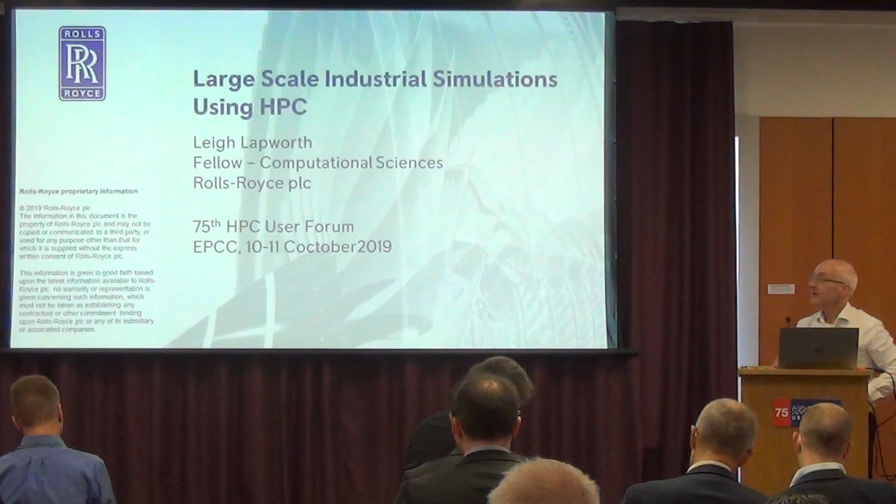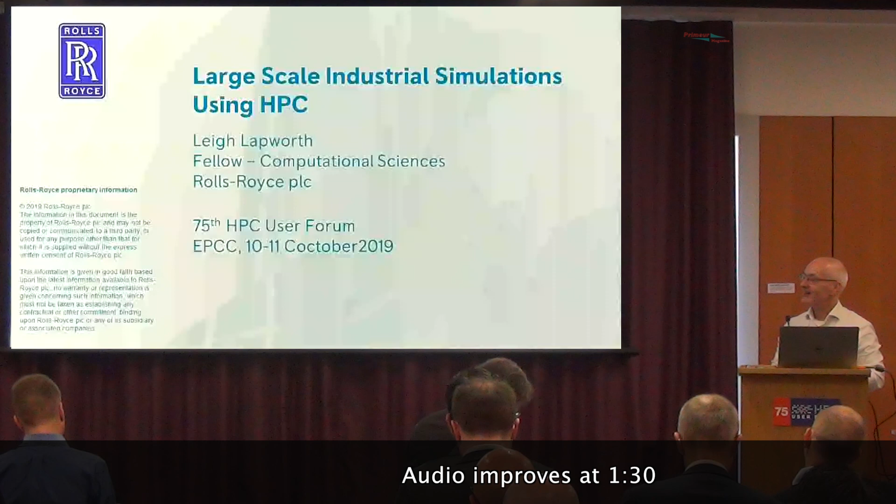Okay, so I'm going to give an industrial perspective. I'm a fellow of Rolls-Royce in computational sciences. I've just passed my 32nd anniversary of working for Rolls-Royce. I spent much of my career doing computational fluid dynamics and I've transitioned into computational sciences.

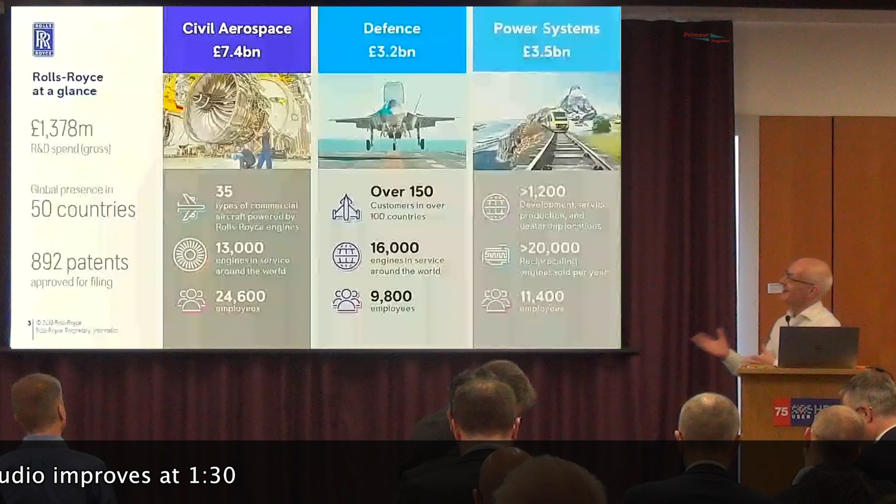I'm going to start, as I always do, with a bit of a business overview, just so everyone's clear on what I'm going to talk about. It's not cars - this is Rolls-Royce. We have three business sectors: civil aerospace, defence and power systems. I'm not going to go through all the numbers, you can see them up there. Civil aerospace is about half the business, twice the size of the other two. Much of my work's been done in civil aerospace, though I have worked in some other areas.

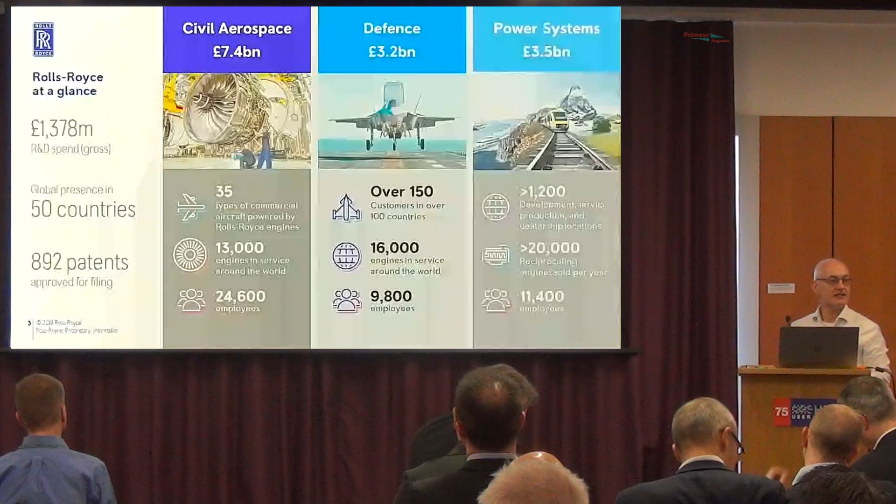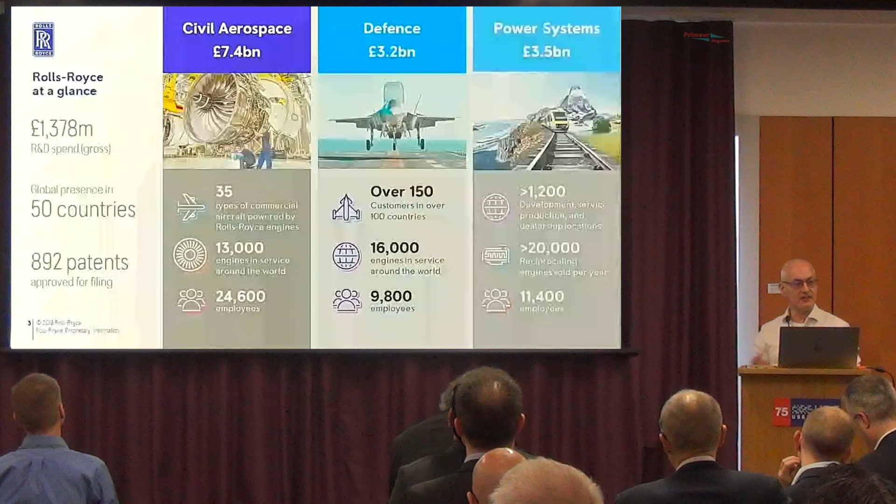We have HPC across all of those sectors, but again, the largest installations are in civil aerospace. Looking at our R&D activity, we spent last year £1.4 billion in R&D, and about 1.1 billion of that was Rolls-Royce's own money, a lot of our own money on R&D.

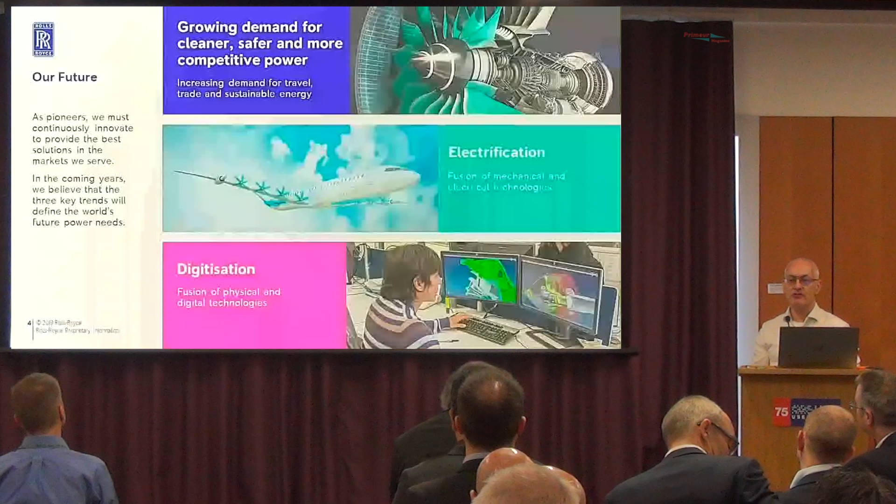Just one other slide on the business - these will be common themes across many industries. Three main drivers for the business: one is the green agenda, cleaner, safer power, and as part of that, electrification. Just as the automotive industry is moving towards electrification, so are we. We've got several activities on that, including one with a company down in Gloucester, and we're hoping to break the airspeed record soon for all-electric flight. We're doing quite a lot on electrification.

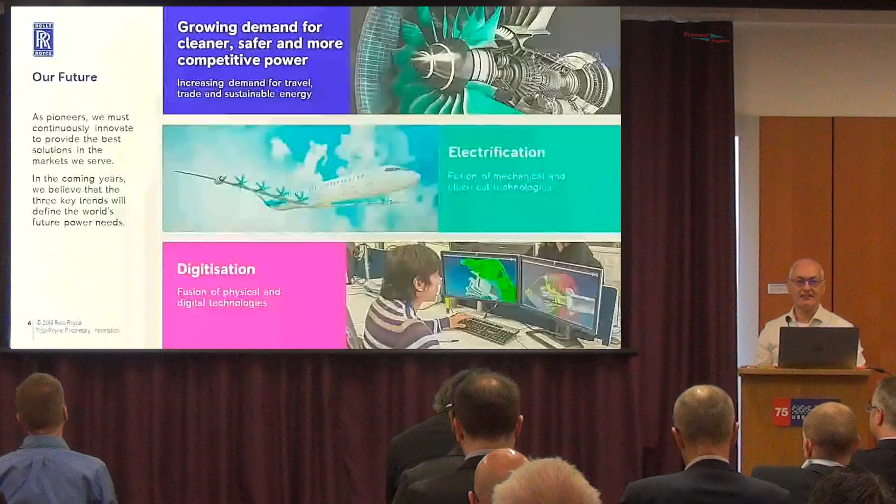And then digitalisation of the business. For those of us that's been in HPC, we've been digitalising our business for the last 30 years, so I'm sure others feel the same about digitalisation.

As you go into the turbine, the turbine blades are about that big, and each one of those generates the same horsepower as a Formula One car. Again, the air temperature there is 200 or 300 degrees above the metal's melting point.

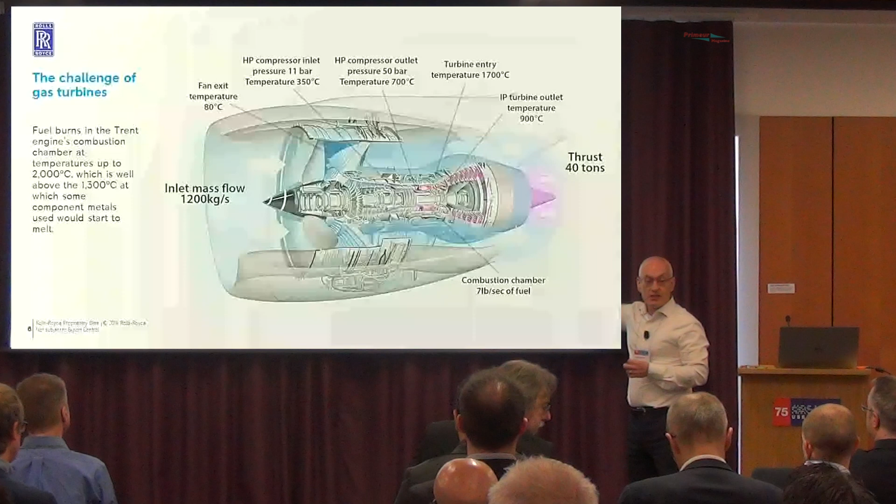As it comes out the back, it's going at 900 miles an hour. My favourite stat: one of the ways we stop the metal from melting is we have coatings on the blades - thermal barrier coatings. These are sub-millimetre coatings, and they can withstand a 200 degree temperature difference across them. So if you got an ice cube, coated it in our thermal barrier coating, and put it in your oven at 200 degrees C, it would never melt, in theory.

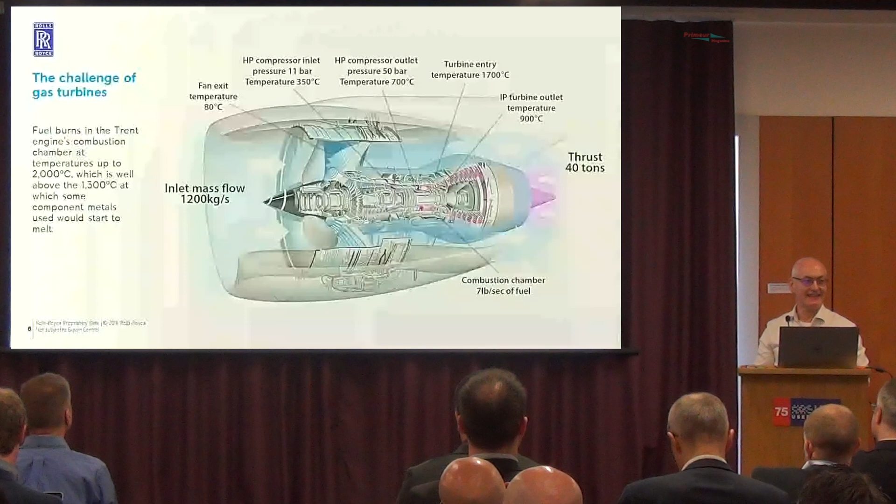So yeah, we all have difficult problems. We like to think we make the most complex product on the planet - I'm sure others could lay claim to that as well. So that's the backdrop, those are the sort of things we're modelling.

In terms of drivers, three drivers I'm going to talk about - we've touched on them already, I think, to some extent. The first is complexity, component complexity. Let me just explain what we've got here. Is there a pointer or something? No, it's not.

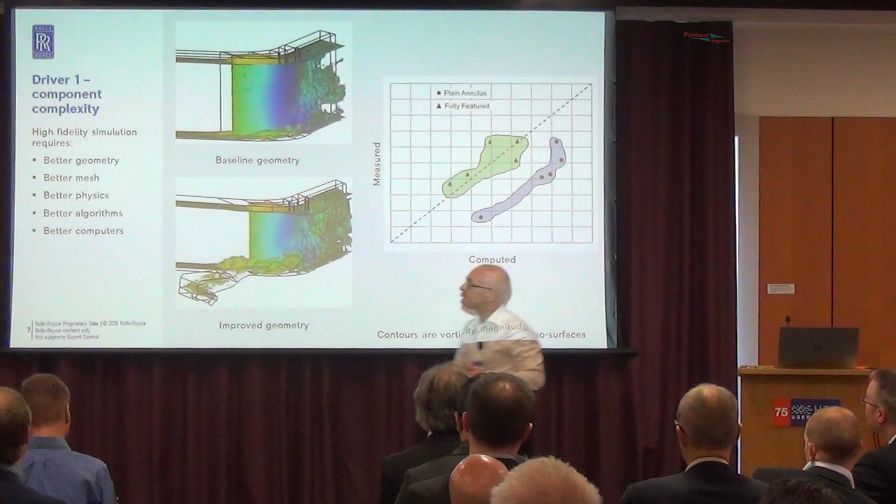Therefore, you get a much bigger corner vortex and a much bigger effect downstream. And if we look at that in terms of measurements, this is CFD predictions versus the experiment. With the approximate model down here, we're some way away from the data.

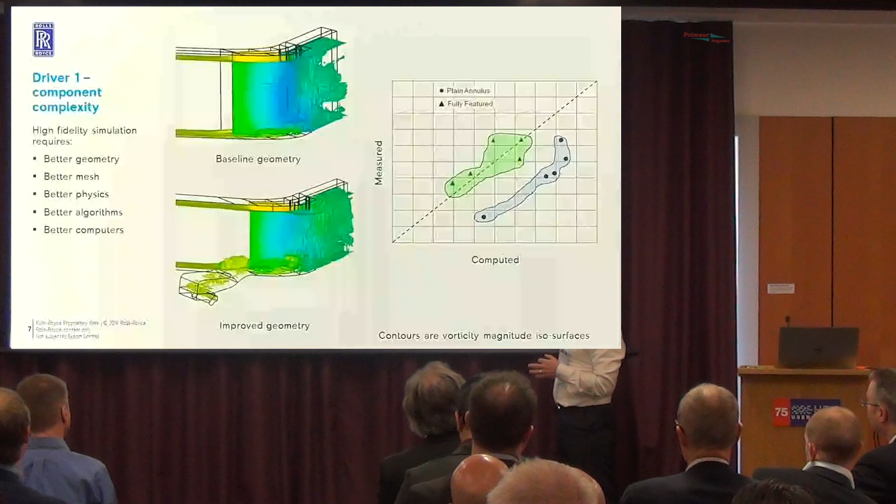As we start to put in the proper geometry, then we get much closer to the data. That's just a line of computed versus measured.

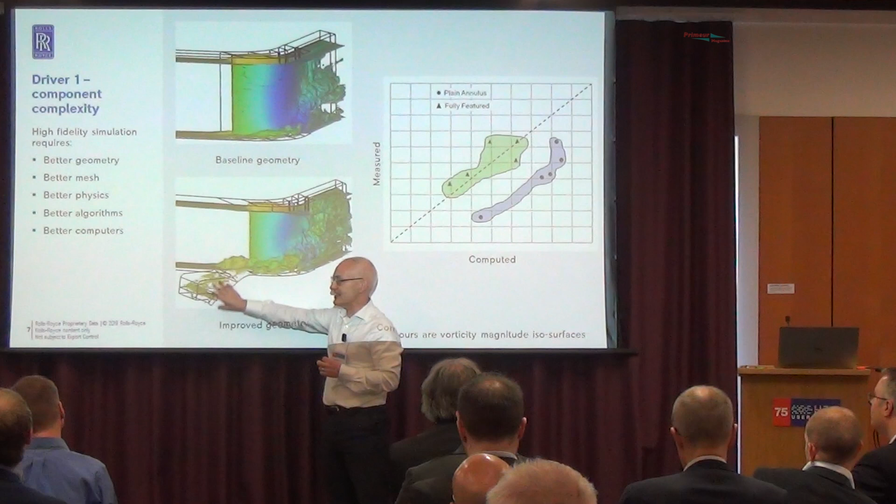One of the messages from this is high fidelity simulations isn't just about physics, it's about making everything high fidelity. You need better geometry, and by having better geometry, you therefore need generally better meshes. The meshing for some of these very complicated geometries is much more difficult than an aerofoil, so you tend to get much lower quality meshes in there. So meshing is difficult, and obviously we've now got much more complicated physics going on here.

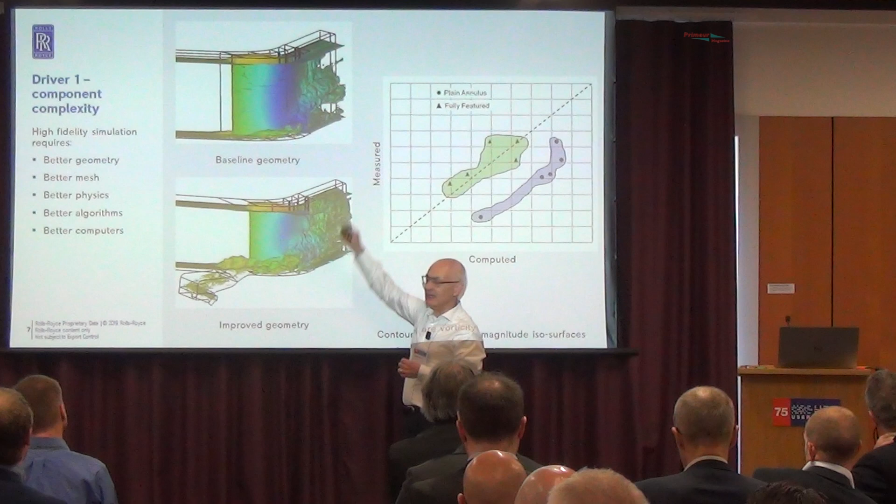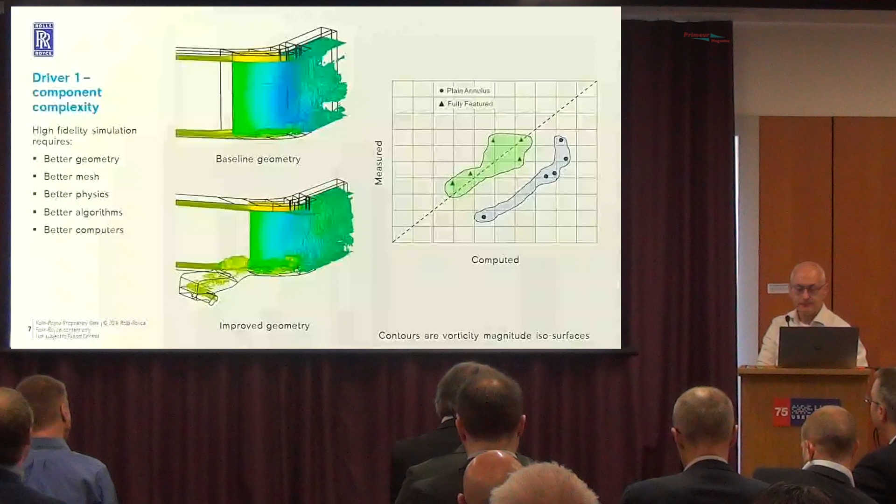So we might just use a normal turbulence model up there, large eddy simulation down here. So physics, and then because you've got these very high condition numbers, because you've got poor mesh, you need better linear algebra, better matrix inversions, and of course that all leads to a bigger problem, and you need better computers to run that. So that's one driver towards complexity.

You've then got component interactions, and turbine engines do what they do by having alternating rows of stators and rotors. There's many of these through the machine, and basically you've got a dynamic topology. One rotor is moving past the next. At the moment, the topology within a domain is fixed, but it is moving.

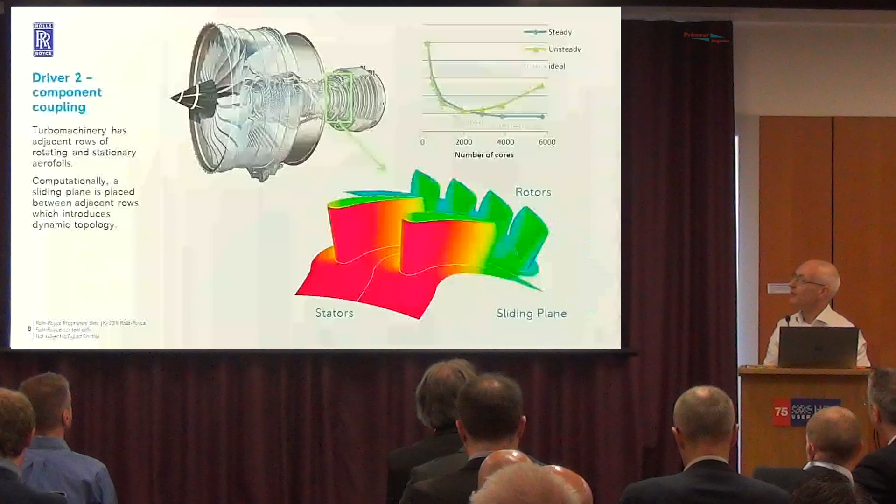It scales similarly to the steady code up to about 2,000 cores, I think that was 1920. But then as you go further, you lose the scaling - it actually gets slower as you add more cores. Those results are a couple of years old, we have improved on those since then.

And then once you can do the component coupling, then you can start to do system modelings. And really, being able to do systems is the other big driver for the calculations.

First reason for doing that is you can move your boundary conditions away, so you can have boundary conditions at the start and the end. When you do a component, your boundary conditions have got to come from somewhere - you can't do a calculation without boundary conditions.

So they often come from a lower order model. We'll do maybe an axisymmetric or a 2D model to generate boundary conditions for a single component. Once we can do a whole subsystem, we then have boundary conditions just at the inlet and exit.

And also, you've got all of the components potentially interact with each other. So in this case, the blade at the back, the blade at the front - lost my mouse again - the blade at the front can influence the blade at the back, and vice versa. So you get pressure waves.

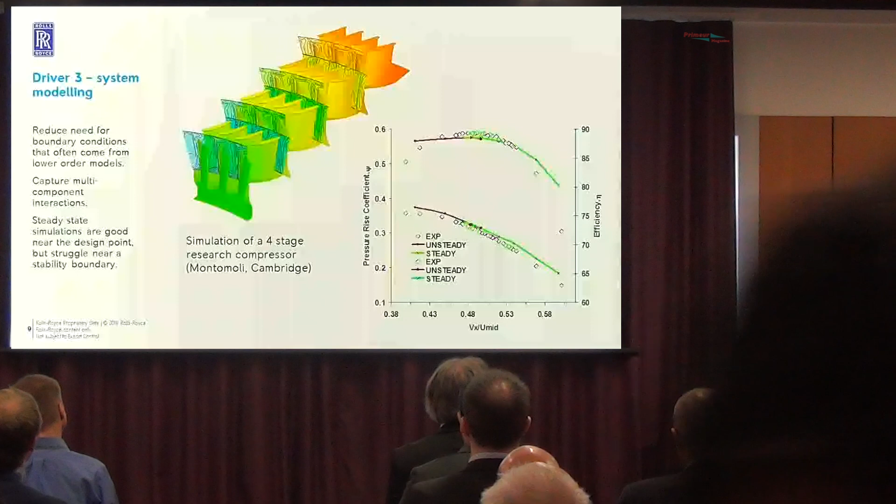We saw the acoustics in the last slide. You can get acoustic waves, pressure waves that come forward from the rear blade that influence the front one, and you get normal convection, vortices, boundary layers, wakes, etc., that then flow downstream and affect the front ones, affect the back one.

And again, if you want to do that and get good answers, there's a driver to do better physics, so you can't really do that with a steady state. So these calculations here, you've got pressure rise, which is the measure of how well you're compressing the air, and then you've got efficiency as to how efficient you are at doing that.

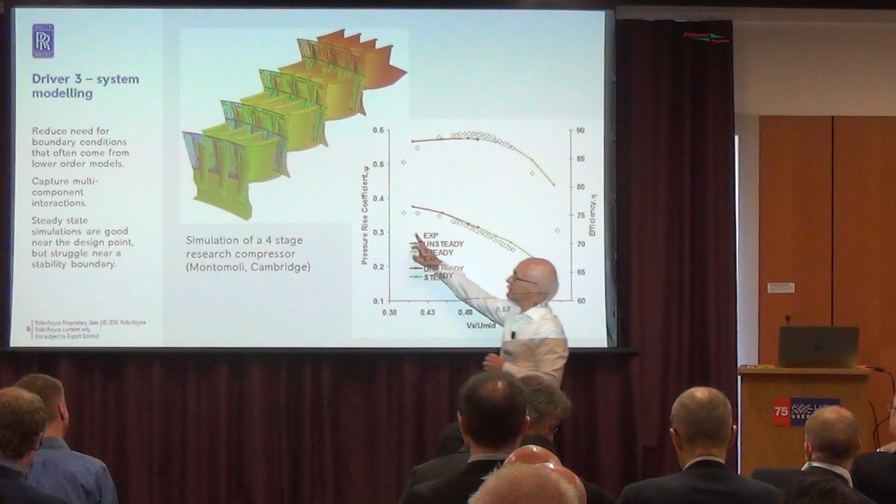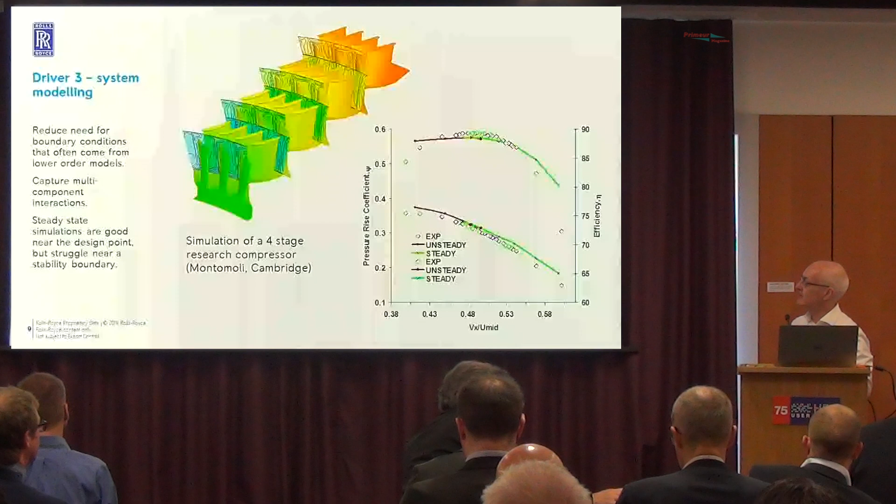One of the key things in designing compressors is what's called the stall point, the operability of the compressor. I'm sure when you've flown, you've all been flying and felt the wing stall - you're flying, and all of a sudden the airplane drops. That's a sort of mini stall on the wing. We have exactly the same inside the machine, so this stall point is an important design characteristic.

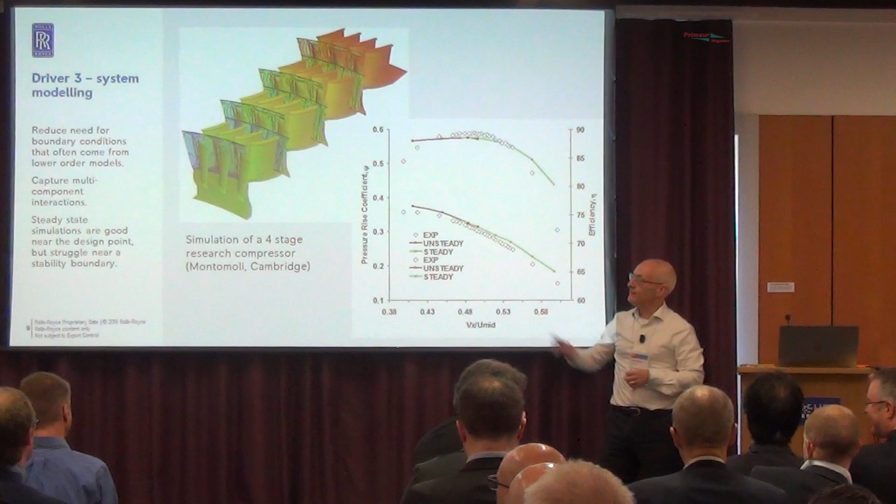What happens here is the steady state calculation can only get that far - the steady state will diverge at that point. If you run unsteadily, it's not perfect, but it's definitely better. We definitely get a much better prediction of that stall boundary.

So what does that mean for us as a business? Why do we do all this stuff? This is the XWB, a new engine. I'm not going to read all of these off, but as you go around the machine, look at the different components, we're using simulation of one form or another. A lot of CFD, finite element analysis, thermal analysis, etc. And things like weight - we do stress analysis so we can reduce the weight.

These are stats from our website. So that's 6 times the computing power applied than the previous generation. I don't know where that comes from, but it feels too low to me. It feels far too low to be correct.

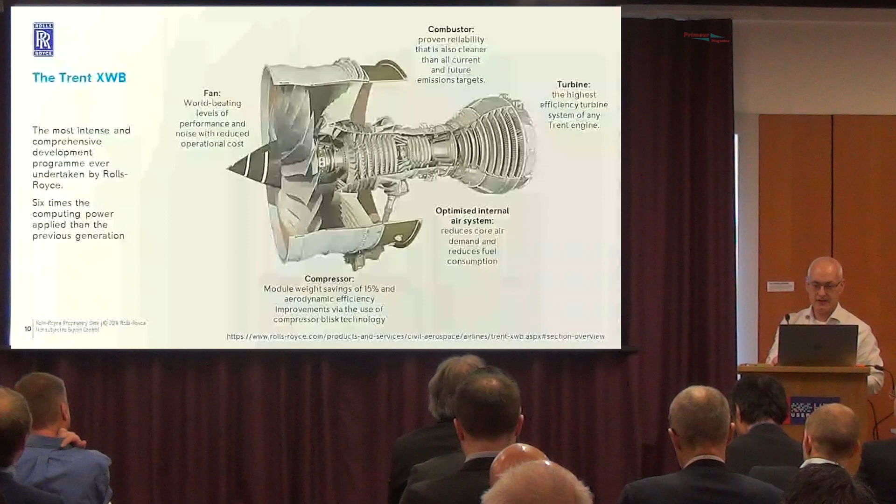I'm not going to go through all of those. I'm just going to pick on one area where we do simulation - the fan. We actually do a lot of different types of simulation on the fan. Basic aerodynamic performance is important. The acoustics we've just seen is also important. We have various criteria - one is if a fan blade comes off, it has to be contained within the engine.

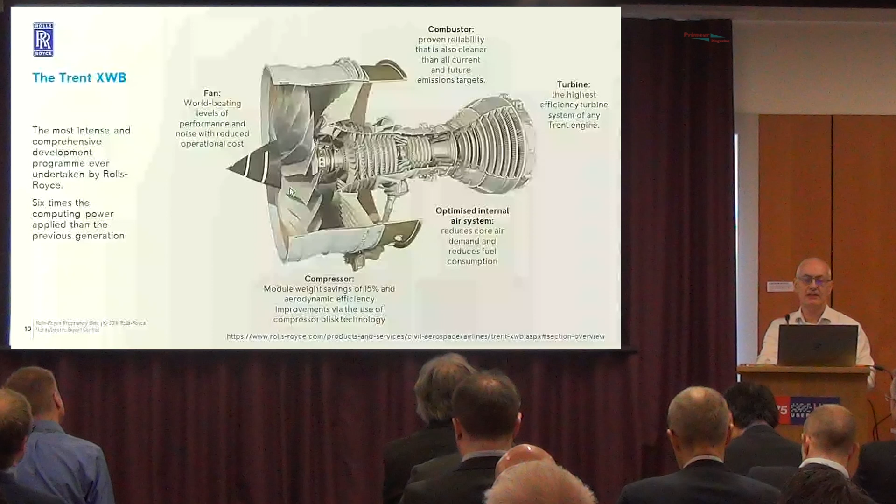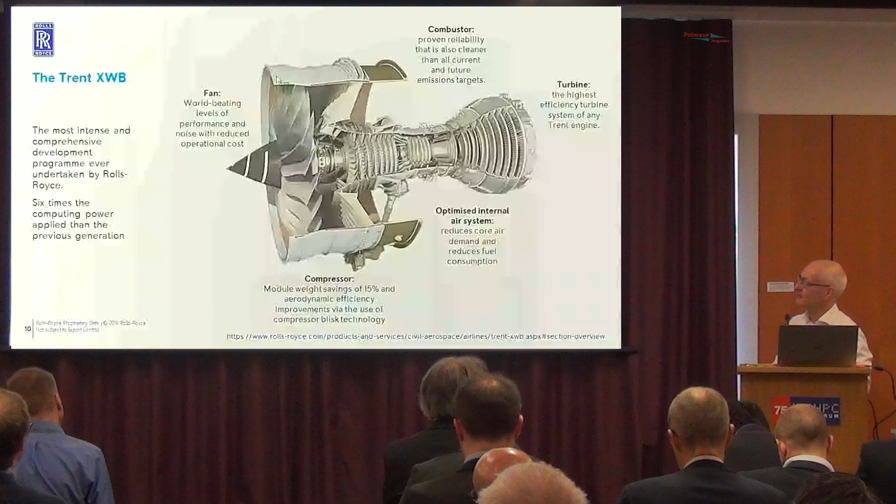The containment around here includes Kevlar and various features that are there to contain the engine, and there's an interaction between the shape of the fan and the containment system. So if you can see here, the fan is arced forward. That improves aerodynamic performance, but because the line of sight of that leading edge of the blade could potentially come outside the blade, we've got to move the containment system forward so we can contain that bit of blade if it comes off. Therefore you add weight, so we have all of these compromises between improving aerodynamics in one place and maybe making it noisier or heavier.

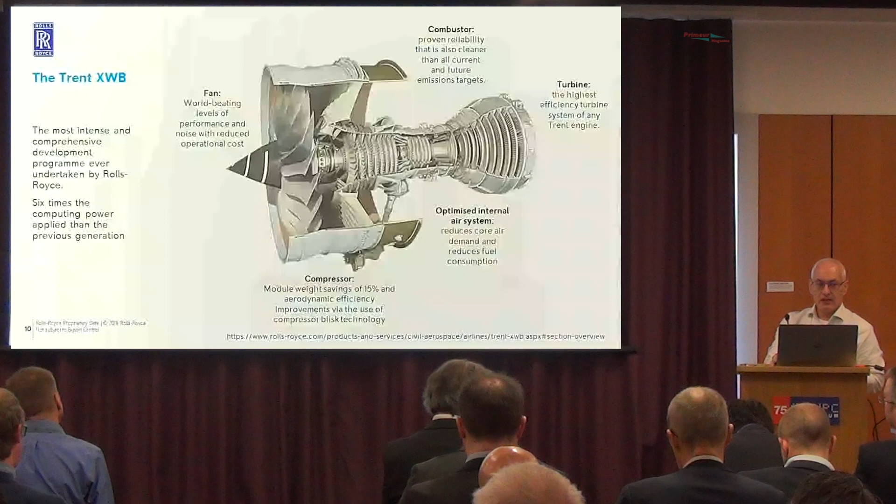One of the simulations we do - there are a number mandated by the FAA, EASA, and the Civil Aviation Authority - is bird strike. For some non-Darwinian reason, birds like to flock at the end of runways, and on civil aircraft there are about 25 bird strikes a day. There's a range of things we have to do - we have to simulate flocks of birds, and simulate a range of heavier birds.

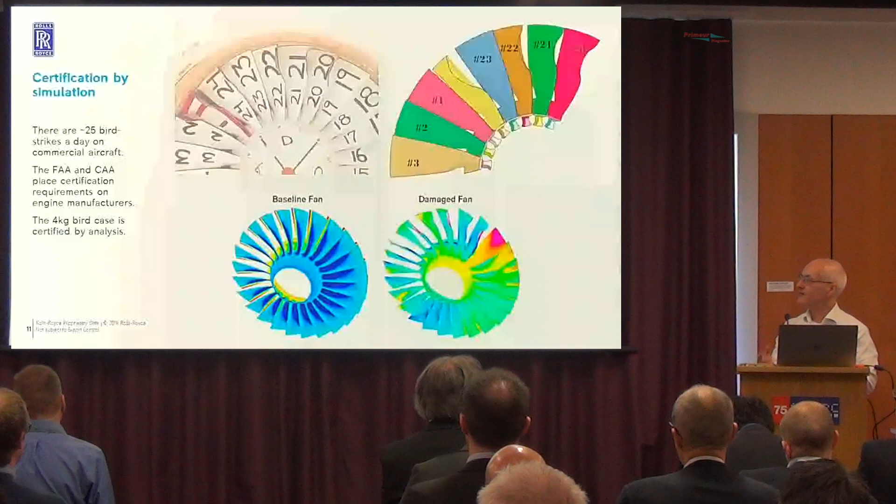If you go on YouTube, you can find some nice movies about some of these tests. The tests we actually do - we fire birds, they're dead before we fire them, but we fire the birds at the engine. There's always this apocryphal story of somebody forgetting to defrost the bird before firing it at the engine. I'm not sure that's true.

But we do simulate this, and this is interesting because it's an area where we've actually convinced the aviation authorities that we can certify by analysis. Obviously one direction of travel for many of us is that we want to do more simulation and get our products certified via simulation rather than testing. Testing is expensive.

So what we do - this is a test we would perform. I'm not quite sure of the number here. This is the simulation, and this is the test. You can see this is the main impact point, and then we tend to get this trailing edge, what we call trailing blade damage. In this view, the blades are rotating anti-clockwise, so the main strike is here, and then these other blades come around and also make a strike. It must bounce or something, which is why the next one's got no damage. It's not my area - I'm not an impact person.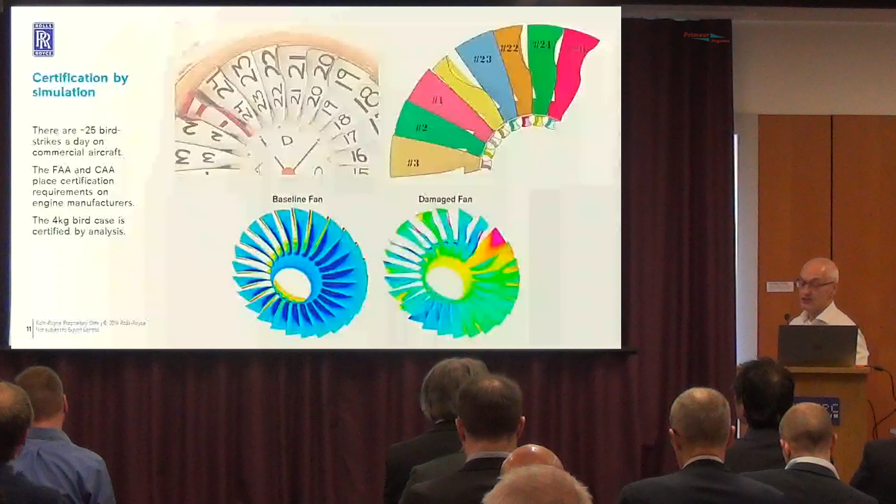So it's pretty good, and as I say, it probably took us on the order of 10 years to go from having the capability to do these types of simulations to convincing the CAA that we could certify rather than do the test. Took us about 10 years of evidence building and creating the confidence that we could do that.

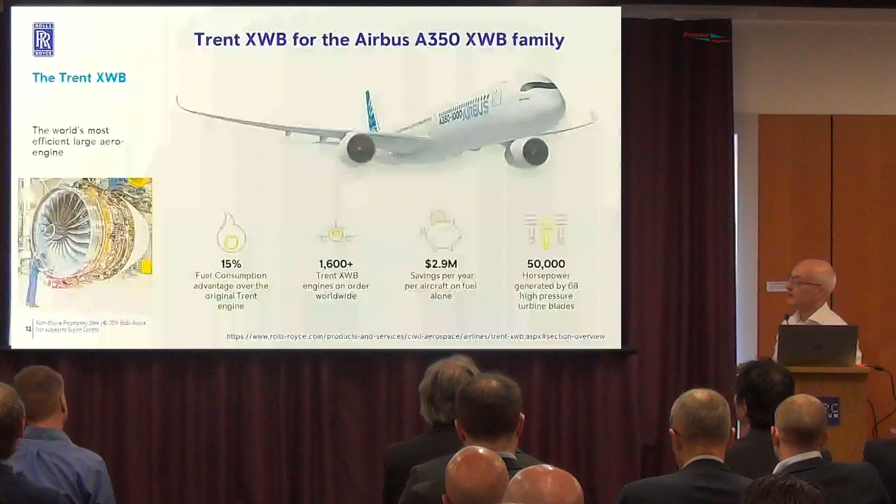So bottom line - from a business point of view, how does simulation and HPC affect the bottom line? There are two I'm just going to pick out. One is fuel consumption - the Trent XWB, compared to the engine it replaces, is about a 15% improvement in fuel consumption. In pounds and pence in the UK, or dollars and cents in the US, that's about a $2.9 million saving per year per aircraft for the airline operators.

Okay, high performance computing, the reason we're here. I think Mark Parsons alluded to this model yesterday, though he didn't show this slide. We've had this slide and used it for 3 or 4 years now.

The basic model is, we as a business can look into the future. We know what the market drivers are, we know what the legal drivers are, and increasingly we know what the societal drivers are. So we can see into the future what we believe to be the business requirements, and therefore what products we're going to have to design, the sort of production systems that we'll have as proven capabilities 3 to 5 years from now.

And often, if we then work back to today, it's really hard to build those test cases. Where today we might build models of 100 million cells, if we want to build a model that's 1 trillion cells, that's really hard today. So we have these breakthrough cases.

I used to sit in physical sciences, now I sit in computational sciences. Part of the model is, unless you can run your code in a reasonable amount of time, you can't really do the physics. If it takes 3 months to run your code, that pretty much limits how quickly you can advance your physics. So scaling the codes, getting them to run large models, being able to handle all the complexities of the geometry - there's a lot of computational science in there.

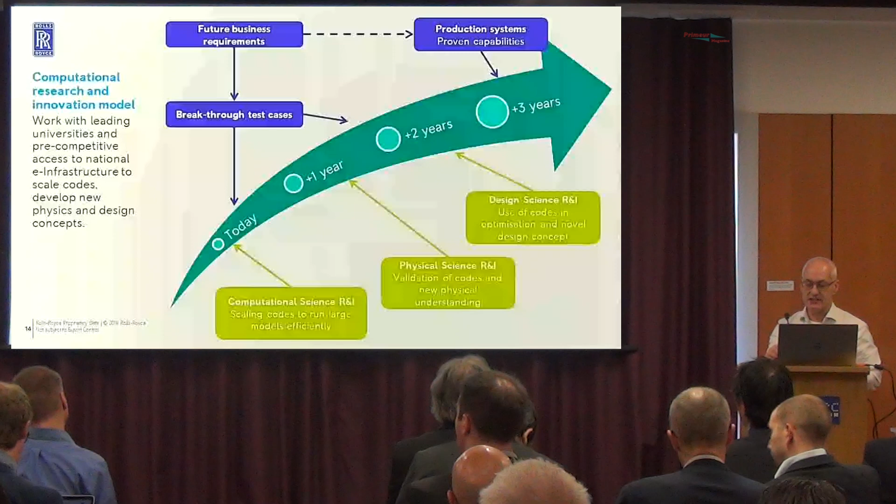Some of it's just straight linear algebra. There's a lot of scaling, and once we can scale codes and run them in a reasonable amount of time, we can start to do the physical research and innovation. From then, we can go on to the design innovation. Once we trust the codes, we can then model different types of configurations and different design choices. That's a slide we've used regularly.

So this is that model in action - this is Archer. There are deliberately no scales on here, so do not ask me what our in-house capability is, because I'm not going to tell you. But as a cartoon level, it's correct.

We started working with Mark, with EPSRC, with Susan Morell, who many people will know, and around 2014, to give you an idea of the timescale, we had a pilot activity on Archer, supported by Mark. That led to what was called the leadership scheme, a sort of scaled-down Insight type activity - Mark mentioned Insight yesterday. Overall in that period, we had about 18 to 24 months of time on Archer where we could do pre-competitive code scaling.

There's a picture up there - some of you know Rotor 37, it's a well-known public domain test case. In terms of scaling studies, we tend to stop when we get to 50% scaling. We managed to scale that to around 34,000 cores, which until a couple of weeks ago was our biggest run. We've now done 55,000 cores on Archer.

The fundamental thing is we couldn't have done that on our in-house systems at the time, for two reasons. One, the in-house system wasn't big enough, and two, the in-house system is there to do production design - we wouldn't have been able to kick off all the designers designing the next engine to do our research and innovation runs. But the economic argument is, when we then upgraded - and in this period there were 2 upgrades, this was the second - that system, those codes, were used almost from day one on that system.

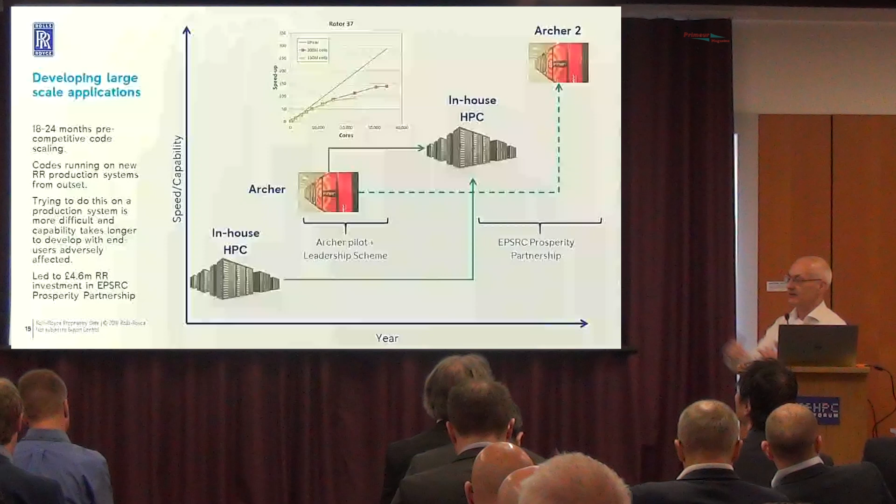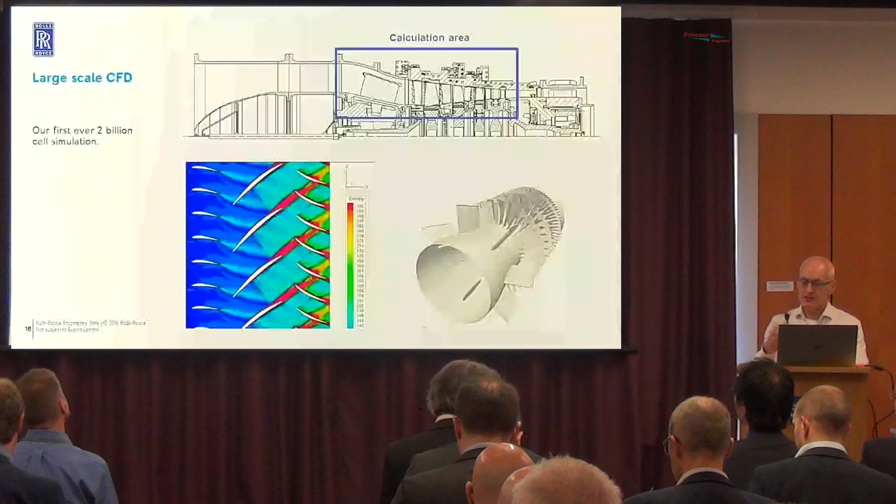This is just a quick snapshot of something we've done. Since putting this together, I think we've now actually run a 4 billion cell simulation. So again, this is allowing us to push the boundaries of the types of simulation we're doing. It's just a bit of a cartoon picture - I'm not going to talk through it necessarily.

To finalise the future directions, we've touched on this - this is our Prosperity Partnership, which we call ASIMOV. I forget what ASIMOV stands for - Advanced Simulation and Modelling of Virtual Systems. That's it, yeah, it is an acronym, but none of us can remember what it is.

It's an interesting one for Rolls-Royce. We do a lot of work with universities, and we have this University Technology Centre type structure where we work specifically with universities for the long term. Our first UTCs started in the early 1990s and are coming up for their 30-year anniversary. This is unique in that portfolio. We have about 30 UTCs, most in the UK, but some in mainland Europe, some in Germany, some in the Far East.

So it brings together the physics and the computers, and as you can see there, we're trying to drive it with grand challenges. Our objective is a complete simulation of a gas turbine in operation. From a computer science point of view, that means several orders of magnitude improvement in computational performance. We're only going to be able to do this with an exascale computer, and we'll only get there if we can improve computational performance. Again, from the whoosh chart I showed earlier, once we can do that, we can start to model things we can't model today, and from that we'll get new science and novel designs.

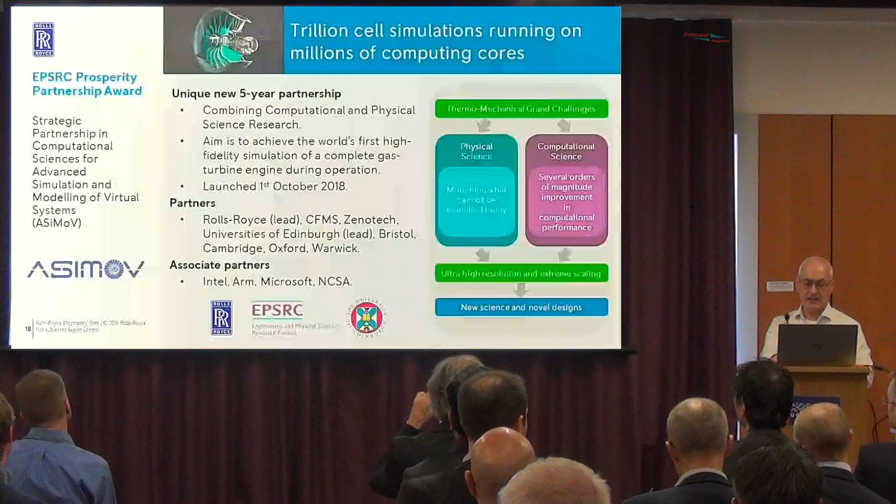So we launched this just past our first anniversary. It's a 5-year program. I'm the business principal investigator, Mark's the principal academic investigator. Then we've got Bristol, Cambridge, Oxford and Warwick as other universities, and two SMEs, CFMS and Zenotech, and we've got support from Intel, ARM, Microsoft and NCSA.

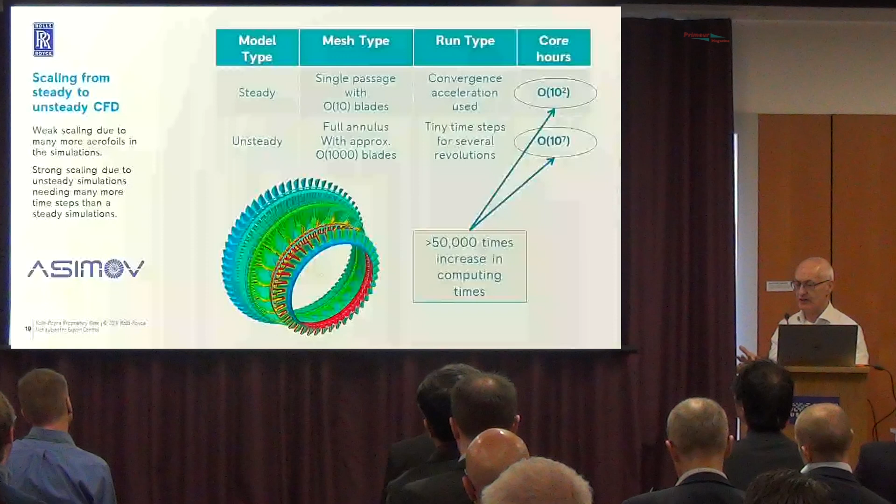Two slides to go. This is really back on the message around scale. Once you go unsteady and want to do a complete turbine, all of a sudden you're going up 50,000 times in the amount of compute power you need. I think we saw this one yesterday as well.

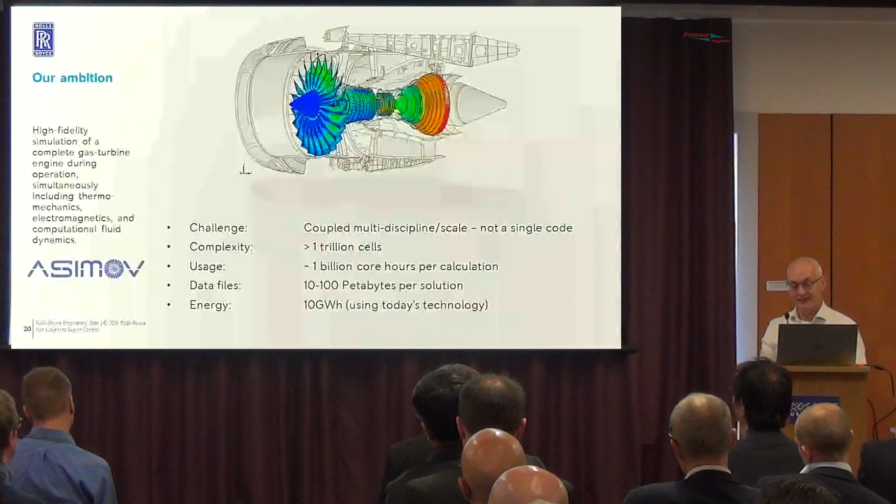So this is a little bit finger in the wind, but we've scaled up the mesh sizes we use today. We do believe it's going to be 1 trillion cells, probably maybe even 10 trillion, 1 billion core hours per calculation. When we put this together, the prevailing cost of a core hour was 10p, so I'm not sure we'll ever spend £100 million doing one calculation. And that sort of leads on...

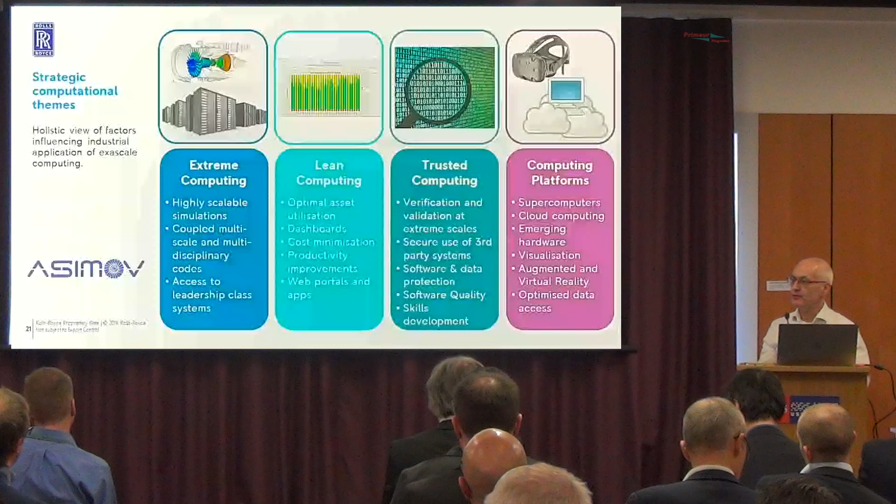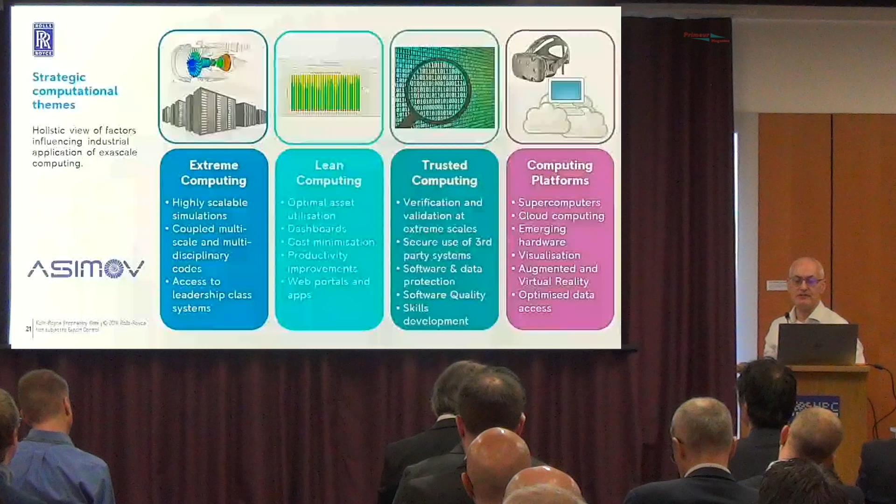Last one, this is the last slide. That leads on to the strategic themes of the program. Extreme computing, we've seen that a lot, people know that. Cost of computing is also really important - we're a business, we've got to justify every pound we spend almost. So lean computing, both in terms of asset utilisation and engineer utilisation, as we potentially move to quite a complicated ecosystem of external high-performance computing, in-house high-performance computing, on the desktop, in the cloud, productivity, queuing etc. Trusted computing - there's a security aspect about security of our data, but also trust in the solutions. We can do these huge calculations, and we might be cancelling a test as a result, so we've got to be confident we're getting the right answer. And then computing platforms, as we saw earlier, trying to be agnostic of computer platforms, so we deliberately separate computing platforms from extreme computing. Thank you.